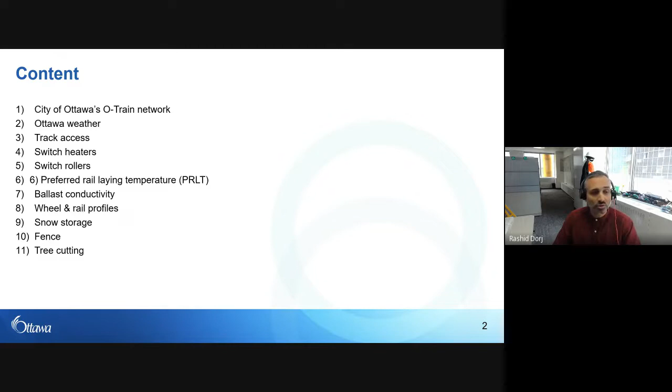So the O-Train network, there's two primary lines. In red, we call it the Confederation Line, internally known as Line 1, and then the green, known as the Trillium Line, known as Line 2. So the Confederation Line is 13 kilometers, double-tracked, electrified. It's a system that just came into operation in 2019, maximum 100 kilometers per hour track speeds.

The train is automated. In other words, it's the train control that kind of controls speed and whatnot, but there is an operator for redundancy in the train cab. And based on the train schedule, it should see about 30 to 35 million gross tons per annum.

Trillium Line. This line is a bit different. It's a pilot project that started in 2001. The city purchased the old train tracks from CP, and then from a pilot decided to launch an LRT system. The initial Trillium Line was 8 kilometers. We're expanding that to another 16, so adding twice as much length. And that train system is DMUs or DEMUs, so diesel multiple units.

City started off with the Bombardier Talents in 2001 and decided to expand the fleet. Bombardier got out of the diesel multiple unit business, so the city looked at other vendors, purchased the Alstom Lints, and now as part of the expansion projects for the Trillium Line, we purchased Stadler Flirts. The track speeds are 85 kilometers per hour, but the train speed is much higher than that. And in launch as part of Stage 2, we expect to have 15 million gross tons per annum.

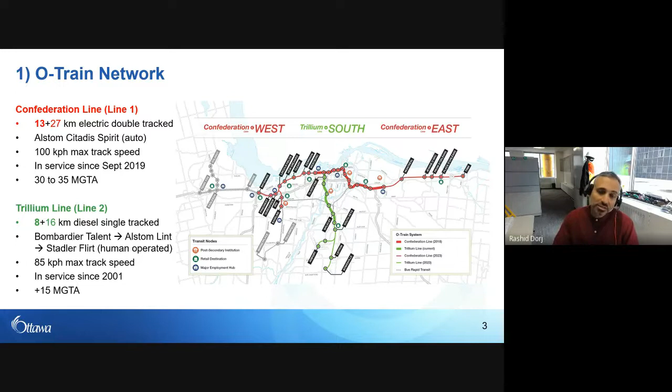In terms of staff, we had Rail Term, today Siemens, who had 1 maintainer during the summer days, turning to 2 maintainers during the winter. Generally speaking, 2 signal maintainers. On the city side, technical staff included 1 manager, 1 track engineer, 1 vehicle engineer, and 1 project manager - not considering operations staff like superintendents.

So Ottawa weather - the photos on the right are not from locations like Oklahoma that you hear about. These are taken from Ottawa in recent years. I wanted to discuss how we sometimes look at averages for design purposes, but how the new extremes are actually important.

On average, the city in January sees -7 Celsius during the day, -14 at night, only 5 days of snow. In July, we see 25 degrees Celsius during the day, 15 C at night, and only 8 days of rain. Looking at average extremes, we're looking at only 11 days of +30, only 16 days of -20, and 224 centimeters of snow annually, which is 88 inches.

That doesn't seem too bad when you look at it, because when you're thinking average, you're looking throughout the whole winter or summer season. But in the new extremes, January 17 of 2022, in 1 day alone, we had 48 centimeters of snow - that's 20% of the average in a single day. In a single hour, 12 centimeters of snow. This becomes important when a green track is proposed, and how that would function in terms of snow storage.

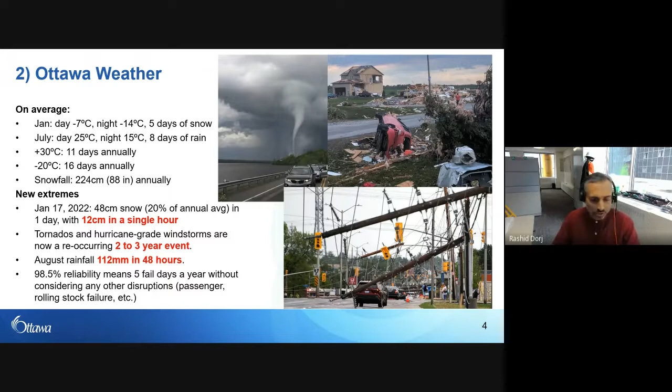These are not unique problems in Ottawa. They're occurring nationwide, just to some other degrees, such as in Western Canada.

I'd like to talk about probably the first point. So what I do is go and talk about the Trillium line - what was done there, and what allowed us to meet really, really high track availability percentages, and what I recommend as best practice. That's my opinion based on my experience, and then it's up to each agency or organization to determine whether it works out for them or not.

On the Trillium Line, generally, the Walkley Yard train and maintenance-of-way vehicles would high-rail at the Walkley Yard. They were already high-railed in anticipation of the last train coming off the line. As soon as the last train came off, the truck was already high-railed, ready to move in and do inspections or maintenance.

This allowed us to maximize the very small engineering hour windows we had. We're talking very small - not an 8-hour block, just a few hours. Sometimes, considering staging during the week, staging on and off of the trains, a 2-hour work window or so.

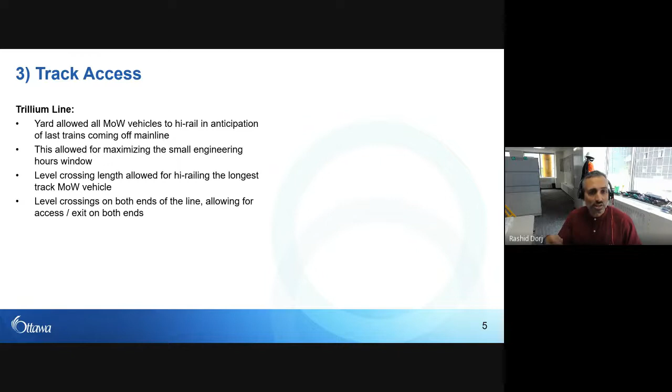They were able to really make use of the access as best as possible, taking every single minute for maintenance work. So my recommendation when it comes to track access is that you maximize the length of your level crossings, and allow for an entrance and exit point, so that your maintainer doesn't have to get off in the center of the guideway and separate the chunks of track. You never know how that can benefit you by adding an extra one at the end.

If you're going to put a level crossing, my recommendation is to consider your vehicle length, and not just the high rail pickup. Consider, for instance, your Holland truck, which is your heavy geometry inspection vehicle, and then add a panel on each end so that they're actually able to high rail easily.

So I did a quick math on this. Based on my experience, a double cantilevered gate would save you 3 minutes for accessing versus a swing gate. So if you did 3 minutes for access, unlock, access, high rail, and then the same thing on the way back, that's 6 minutes per shift. On a 2-hour engineering shift, that actually represents 5% efficiency.

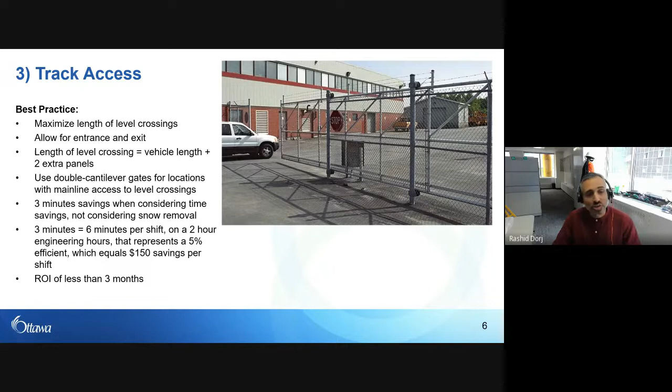If you did the math on that, take 2 track maintainers, 1 high rail truck, and the charge rate for that, you're looking at $150 savings per shift. The price difference is probably $10,000, so you're looking at a return on investment of 3 months. So it's almost a no-brainer to really consider access when it comes to helping out your track maintenance staff.

So the next subject is switch heaters, also called SCDs, switch clearing devices. On the Trillium line, we had 2 styles. We had natural gas—wherever we had access to natural gas, we installed natural gas, and wherever we didn't, we put in propane. The model was the Hovey Hellfire, which is today owned by Thermon, and it's a hot air blower.

In terms of natural gas, it's a substantial saving. Based on the math I did about a year ago, it was about 15% of the cost. In other words, if it costs you $15 with natural gas, you'd be paying $100 for electric or propane. So there's definitely advantages if you're looking to operate the line 20, 25 years, considering the construction costs of bringing in natural gas. Propane is almost similar to electric in terms of heating costs.

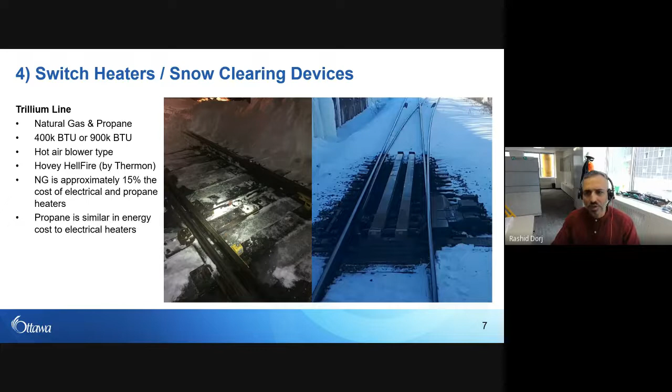And then what we have here is the Confederation mainline. I just wanted to discuss what Confederation uses, because Confederation's stage 1 used electric heaters. The electric heaters only rely on a point nozzle—I'm sorry for the photo, but basically there isn't a center duct. It's just these 2 point nozzles shooting hot air. It's a 45 kilowatt unit.

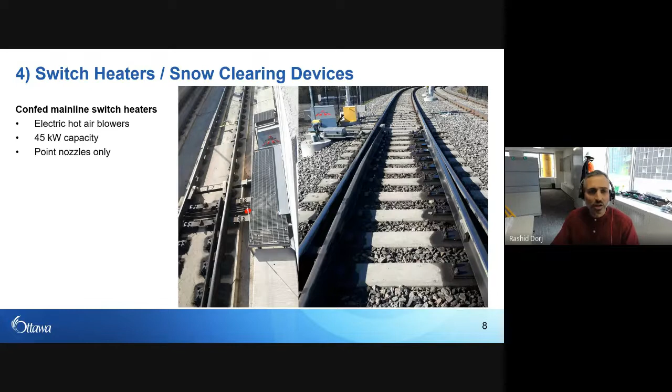And again, it relies on point rails. The unfortunate issue was that sometimes the point rails, the slide plates weren't cleared by the nozzles at the end. They just didn't have enough heat, didn't have enough airflow to reach there.

So the upgraded versions for the Confed are kind of a combination of three that have been looked at. One is a heat trace cable, basically on top of the switch heater with the point nozzles. There's a heat trace cable that runs alongside the stock rail, and it's actually worked decently in certain locations. If not, there's a center duct installed - this is a custom center duct made for this particular switch, and it reaches as many slide plates as possible so there isn't snow or ice jammed preventing the point rail from going into location.

Another solution that was looked at was switch heater covers. These had limited success, and some of it was not necessarily due to preventing the snow from getting to the plates, but more about how it impacted the mechanism of the machine.

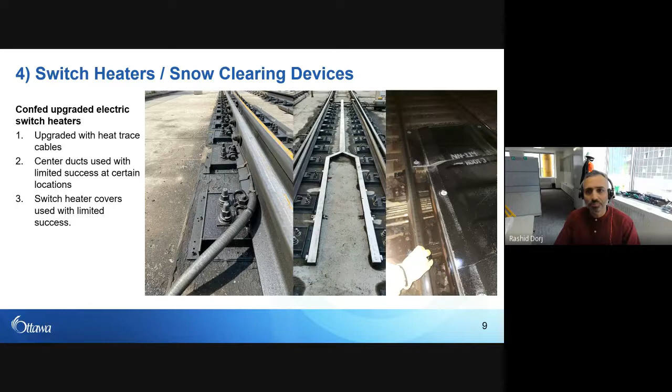So for stage 2, we're going entirely with propane and natural gas whenever we can. Certain locations of stage 1 will actually have propane and/or natural gas, and they'll look just like this. Again, point nozzles, the point rails are here. You've got a center duct - this is a heater duct that goes into the unit. And the unit here has either a natural gas or propane connection.

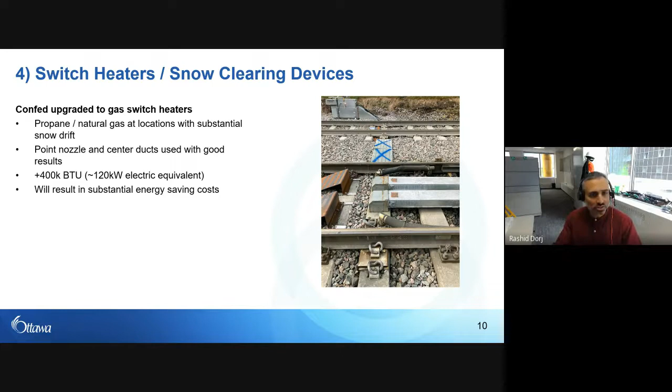I put plus 400,000 because I'm not sure if it's the 400 or 900,000 BTU models, but the equivalent in electrical is 120 kilowatts. So it's substantially more, and in the natural gas equivalent, it'll save the city a substantial amount of energy costs.

Jumping into switch rollers, I think this is probably a presentation on its own, because there's just so many different angles to it.

So for those who don't know, a standard slide plate for a switch - this is the stock rail, this is the point rail or switch rail as we call it. There are these slide plates, these are lubricated, and basically the point rail moves back and forth, relying on lubrication to prevent over force on the switch machine.

So you need lubrication. An important thing to consider is that lubrication, based on experience on the Trillium line, evaporates at a different rate in the summer and winter. So your type of application, your frequency of application, is different.

On average, my experience is that we lubricated the plates every 3 days, and that depended on the state of the switch. If a switch had vertical problems, and you see here where it was excessive rubbing, then you need to pay a little bit more attention and apply more lubrication.

This is kind of the mechanism, this is a slide plate. I just did a quick cross section, even though this doesn't apply actually to the Trillium line.

There's also discussion of using graphite grease. Graphite grease works awesome in a theoretical sense, but when you look at the practical use of it, you see that it's not always ideal.

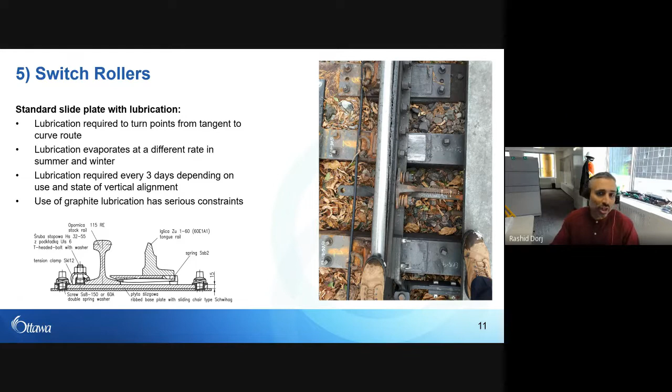It's unfortunate to see that some major new LRT projects from the US and Canada are still relying on slide plate lubrication. It's unfortunate that they haven't actually looked at switch rollers, because there are so many different benefits.

But there are different angles to it, different applications to it. So the general theme when you're looking at choosing the best roller, you need to determine whether you have an AREMA style point rail or an EU style point rail.

AREMA point rails are sort of like this - it's got a reinforcement bar in the center, and it leaves you with these holes. If you have an EU style, it's a section that's on its own - it's basically carved, only used as a point rail.

You also have to look at whether your switch is heated or not heated - those impact your choice. You have to look at whether it's a brand new or a retrofit installation. And then there's generally three styles - well, two styles and a third one that's completely on its own.

There's the plate rollers, which are this style - basically a plate that swaps out the existing slide plates. It's a plate that's usually twice the thickness. Schwihag is probably the most famous in terms of name. Voestalpine has the blue roll. Vossloh makes an equivalent - I think this is probably a Vossloh cross section, but they look more or less the same.

The other is an Ekoslide. We use these extensively on the Trillium line, and basically it's a point rail attached to the point. You put in longer bolts, put this little bracket with the roller under it, and then put the bolts back on. It looks like this. In this case, I believe this is a number 11 turnout, so you have 3 sets, a total of 6.

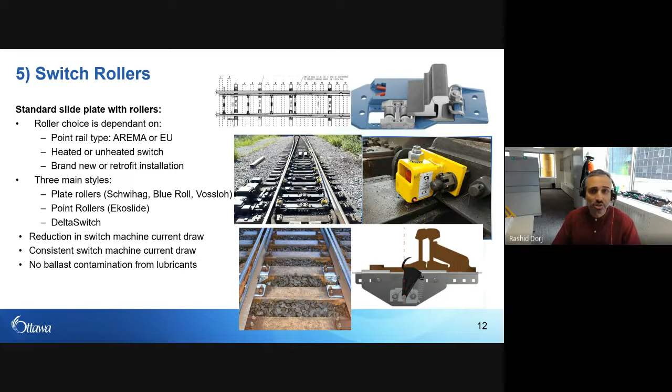I did a quick cost comparison based on my experience when they were to be adopted for Trillium line turnouts. The plate rollers are probably the most expensive - it requires lowering the tie, which requires more effort, and putting in brace plates, but still, a set of 3 costs you $20,000 per turnout.

Point rollers are less expensive, $6,000 for a set of 6, and then the delta switch is $3,000, and they each kind of require their own maintenance. It's not one approach that will fix it all - you really need to look into it. There's different implications in terms of the way they're installed, the impact, maintenance, but I can guarantee in every single case the return on investment is guaranteed.

In terms of the most expensive, we adopted them on Trillium Line because we used our switches 184 times a day - that's 184 movements, because it was almost entirely single track. When you consider 184 movements, your switch gets worn and starts having consistent issues.

So you need to really make sure you have everything on your side in the sense that you're avoiding failures, forecasting when things go bad. Even in the case of the plate rollers we implemented, based on a quick calculation, it's a 5-month return on investment. The point roller is 1.5 months, and the delta switch less than 3 weeks.

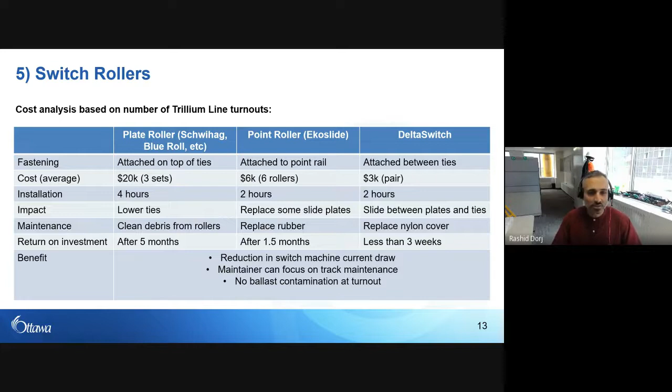I'd like to talk about preferred rail laying temperature and what really worked well on the Trillium line. So on the Trillium line we inherited a CP practice, which is a freight practice.

On the Trillium, our range was 30C to 35C, and 32C was the preferred rail laying temperature. The preferred rail laying temperature shouldn't be confused with what I hear a lot of people say, de-stress temperature, because the practice in North America, Canada and the US is generally to put the rail in tension - we actually stress the rail. So 32C was our stressing temperature, meaning that most of the year, the rail was in tension. I'll go in my next slide and explain some of the math to it.

But the system was coupled with a rail break detection system that ran on 18-volt DC, and it's a current across the rail. The moment the rail breaks in the cold winter, if it did, the rail break detection system would flag and say, hey, there's a rail break. You need to look at it.

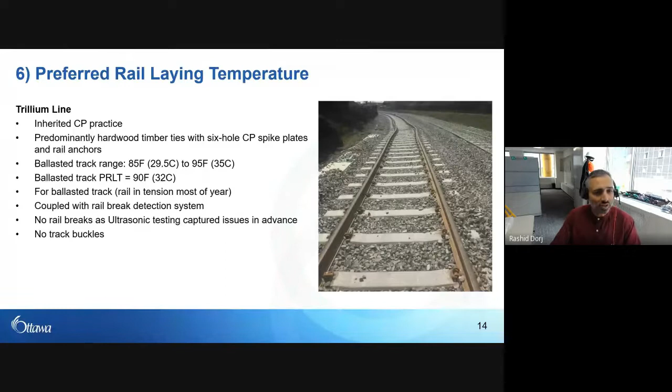Now, I wanted to do a quick math exercise, because I think in terms of best practice, when you're looking at your agency or your project, it's probably something to consider. You need to know your buckling temperature. You need to know your break temperature, okay?

Based on the literature review, and I'm happy to have a conversation in depth on this with anybody who's interested - the rail temperature, on average, based on my experience on locations that have direct sunlight, is 25 degrees higher than the air temperature. Buckle temperature is 40 degrees above the preferred rail laying temperature, which meant that for Trillium, it would have been at 72C.

So if you work your way backwards, at what temperature would the track possibly buckle? And that's for a poorly maintained track - you're looking at 47 degrees Celsius. The hottest temperature we ever recorded in Ottawa is 38. I'm convinced that eventually we'll reach the mid-40s based on the weather patterns we see today.

But I think the lesson here is that you can't just implement the best rail laying temperature. You need to be on top of it. You need to adopt IoT devices for understanding the correlation between your rail temperature and your air temperature, like the 25 degrees that I discussed earlier.

If you can, in your design, avoid anything less than 184 meters as per TCRP. If you can't avoid that, change the track type from ballasted to something a little bit more rigid, like direct fixation. If you can't do that, then consider track anchors like you see in the photo on the right - anchors that go deep in and do a pretty good job of holding the track in place. Ultimately, you need to consider that your rail needs to be re-stressed, okay?

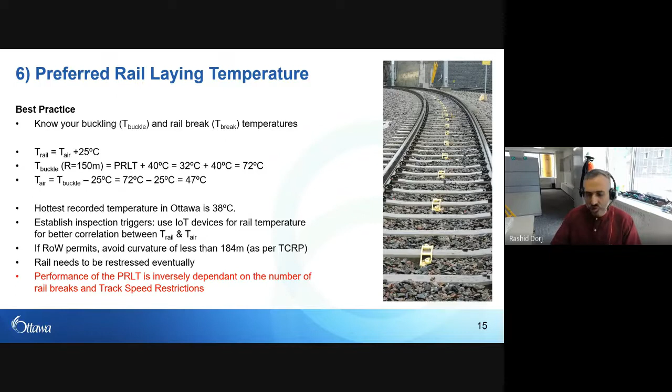So a couple of subjects I wanted to cover as best practices - wasn't necessarily an issue on the Trillium line, but it's been an issue we've implemented on our Stage 2 projects. It's ballast conductivity, and that's a problem for electrified track. To my knowledge, AREMA and TCRP 155 are not prescriptive on this, but it is definitely a problem on every single electrified track. They have a problem with stray current.

Usually the means of addressing it is you insulate the rail, but when it comes to the ballast, you clear the underside of the rail and make sure the ballast and the rail never touch each other. But it's impossible, perfectly impossible. The photo I took on the right not long ago - sometimes you get a can that gets under there, and believe it or not, it results in substantial current loss, and current loss equals material loss due to corrosion. So if your track is electrified, definitely test it for conductivity.

CN has a great standard for that, 12-20C, and you basically test your ballast for less than 3,000 ohm-meters.

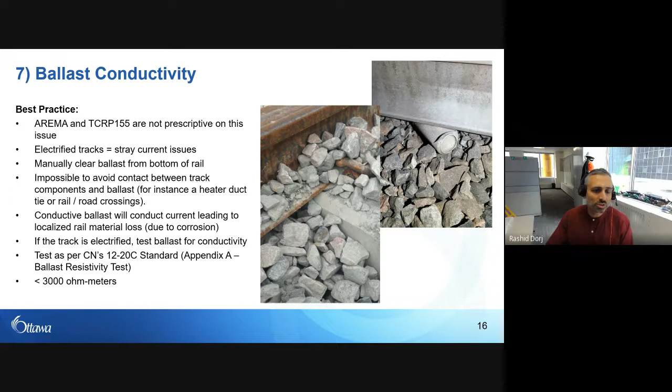Alright, the Trillium Line had multiple wheel and rail profiles that were developed by the NRC, the National Research Council of Canada. The rail cant, because it was CP, was a 1:20. The wheel was a 220, which actually had a 1:20 general thread profile. The super elevation was capped at 75 millimeters.

And so the NRC developed various profiles, right? They developed 3 tangent profiles, 1 high rail profile, and 1 low rail profile. I can tell you they're very difficult to tell the difference, but they are different. So our target on the Trillium Line was we took the 3 tangent profiles and split those evenly across the tangent sections.

Wherever we had shallow curves, we adopted a different tangent profile. Wherever we had sharp curves, we developed high rail and low rail profiles. And we implemented those via profile grinding - we went through with a rail grinder.

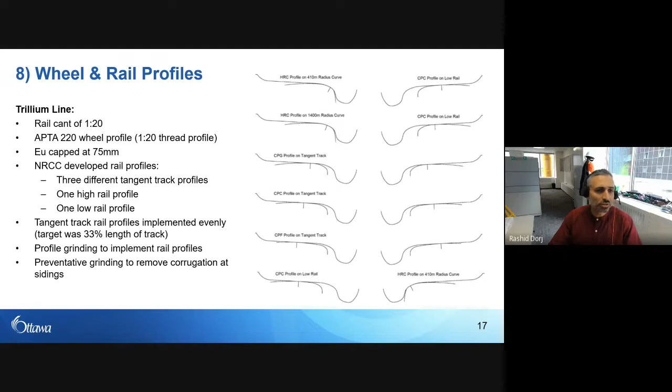To my knowledge, I have never seen RCF on the Trillium Line in the years that I worked on it. I attribute that success to the good match of the wheel and rail profiles together. Occasionally we did implement rail preventative grinding to remove corrugation that we had at our sidings.

My suggestion to the industry is basically understand the application of super elevation. Do not maximize your EA, which is your actual, or your EU, which is your unbalanced. Know the difference between when it's human operated and software operated, because they work differently.

I mentioned it earlier on - try not to maximize the minimum track radius. I know the train manufacturer says they will operate at that speed at those curves, but there's a huge maintenance implication to it. As a designer, it's important to know that implication.

So I think, based on my experience, there are two things. You absolutely, if you operate light rail systems, need to have rail profiles. You cannot expect to have a single uniform profile across your network and get away with any RCFs. If you do, I'd like to meet you.

It's because the concrete ties, the direct fixation, hold the rail at the same location every time. So you don't have gauge widening like you have with timber ties. Your wheel is running at the same location every day and night, so you're increasing the stress levels and you start having cracks. That's really important to understand - you won't be able to get away with a single profile.

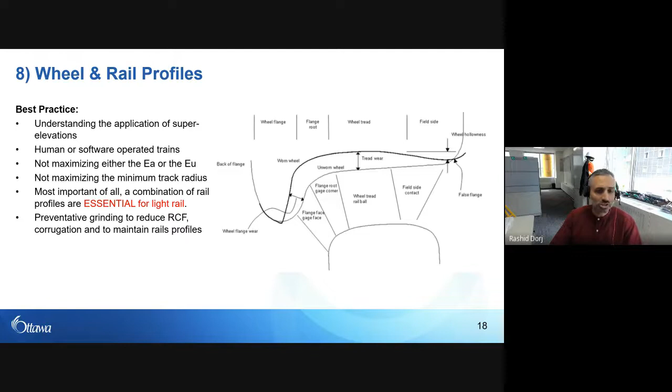At the same time, you need to have in mind that you need to do preventive grinding to remove RCF or corrugation, and also to maintain your rail profiles from wear. I know I'm going a little over time, but I'll quickly go through this.

Track centers is probably something that's really overlooked. A lot of times they're developed based on the envelope of the trains. But on the Trillium Line, we had very little issues with snow storage. The distance between the two tracks, this is a Brookfield siding, was in excess of 5 meters. It's difficult to tell from the photo, but the regulator was able to plow in the center on the side with no problem, and there were instances with a freak snowstorm.

The city was shut down, but the train, because of that ability, was still operating. The Indusi as well, this is a passive train control, was on the outside, not in the center, which allowed the regulator to remove the snow storage in the center of the track. A lot of networks have it in the middle, and that poses a problem where you have to remove snow by hand.

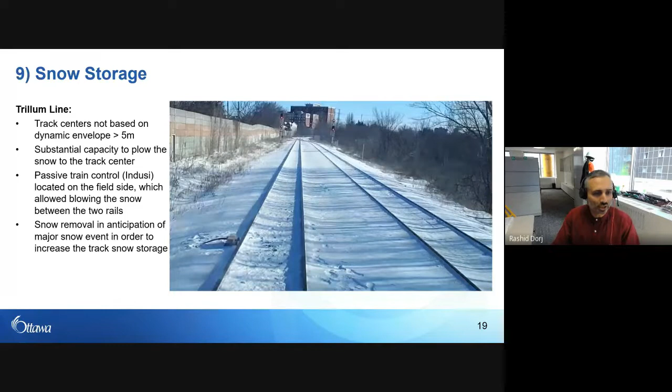So the best practice, I'd say, is try to avoid a scenario where you're putting it close. I know sometimes real estate doesn't allow you, but be mindful that it does have an impact in terms of snow storage. If you're going to have a ballast profile between two tracks, make sure you don't level off the two tracks' ballast profile, the 2-to-1 slope. Leave your 2-to-1 slope in the middle so you actually increase the capacity.

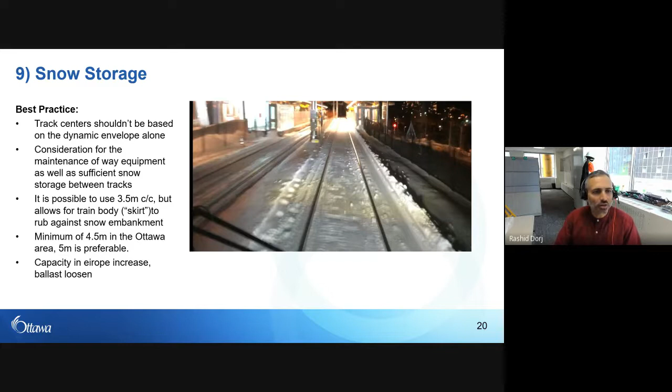All right, I'll just go quickly over these. The fence on the Trillium Line was, again, it was a freight corridor. Freight corridors usually have a very wide right of way, so the railway put the fence line as far as possible. That allows for inspection during the day without impacting train service. Sometimes I would show up and look at the train go by at a specific location that was an issue. If the fence was adjacent to the track, I probably wouldn't have been able to do that.

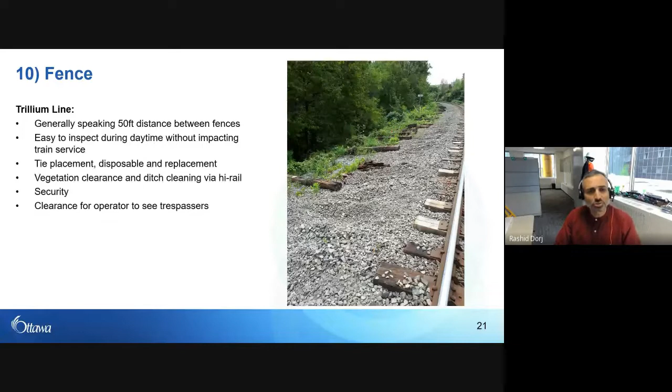Sometimes ballast renewal is an inevitable process for a track. At 150 to 300 million gross tons, you're going to have to do this. If your fence is adjacent to your track, you won't be able to do that easily, so be mindful of this when you consider the maintenance cycle. Do you really want to remove the fence from one end of the alignment to the other when it comes down to ballast cleaning?

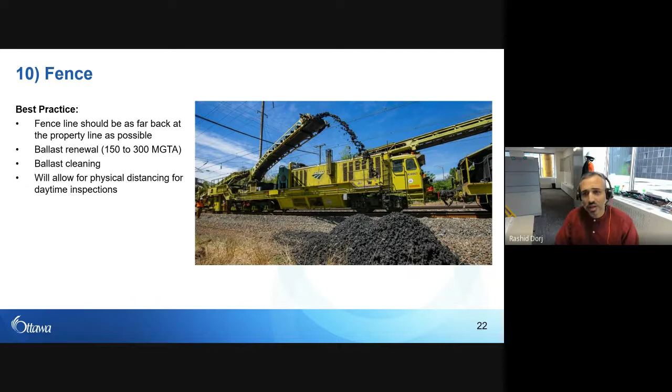Another subject where the fence helped was tree cutting. Because the fence was on the outside, whenever a tree fell during a major windstorm, it was less likely to fall on the track.

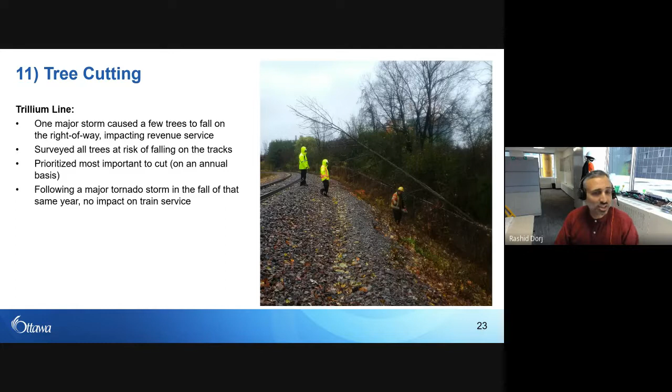We had one instance with a major storm where a bunch of trees fell on the track. From then on, we decided to survey every single tree at risk of falling on the tracks and prioritize cutting on an annual basis. Following that program, a storm happened a couple of months later with trees falling all over the city, but not a single tree on our Trillium Line fell down because of the work we had done.

Apologies for running through it quickly. I'm hoping this presentation was insightful and brought about questions. I'm happy to continue the conversation in the QA period or even afterwards. Thank you.

Thank you so much, Rashid. I received a question while you were presenting, and there are a few people with their hands up. Let me start with the first question. Jihad asked: is one pair of delta switch sufficient for a number 20 turnout?

That's a good question, I'd have to look into it. I think there's an implication in terms of the throw rods, or brace rods, the rod that holds the two-point rails together. There's an implication of where that's located and where you place it, but I can definitely look into that and see if I can find an answer. I'm interested to know as well.

Great question. We have a list of people with their hands up. Mohsen Yazdi was the first one, let's hear it from you. Hi everyone, and thanks Rashid for the great presentation.